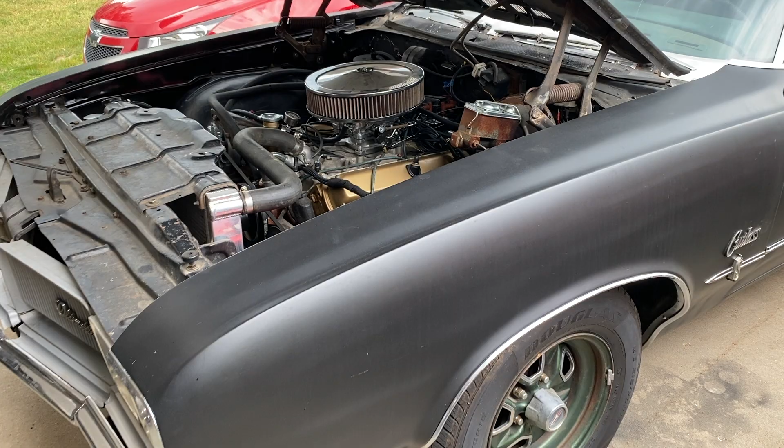All right, let's go ahead and take you inside the engine bay here. As I mentioned, there's the Champion radiator, and then you can see the single fan. I think that's a 12 or 13-inch fan, and it's held in with those little zip tie things that go through the radiator. I'm not a huge fan of those, but they do work in a pinch. And then I have the 2 wires here.

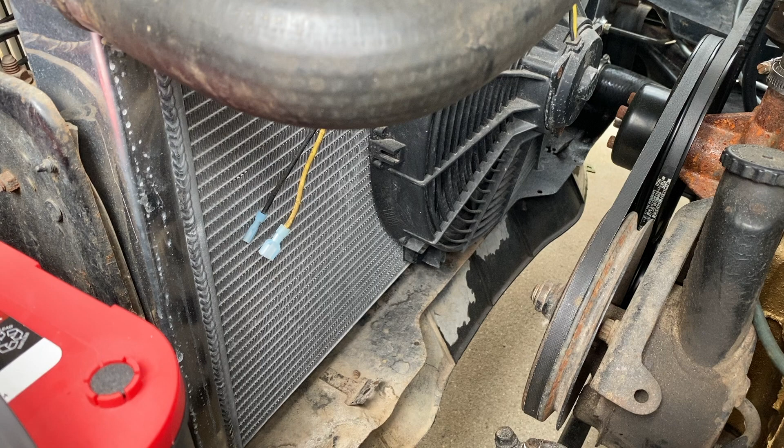I've actually taken out the wires. I haven't been driving the Cutlass too much this year, so I haven't really had any issues with it overheating yet by taking it longer distances, but I went ahead and took out the switch currently, and it's just 2 wires hanging. But to take this out, it's going to be relatively simple - just gotta cut the zip ties holding it in, and then remove it from the radiator. But this thing worked okay, but I think with the fan shroud not there, it's really not doing its full potential. So let's go ahead and remove this old fan, and then we'll take a look at the new fan shroud and dual fan system.

So before we get the fans out, I went ahead and took out the battery that I purchased last year. This is an Optima Red Top, and I've just been having some major issues with how it's been charging, holding up, and the cranking power. So I'm actually going to have my neighbor Kyle come over, and he's going to test this for me. He has all the means to actually test it with all the right tools and everything like that. So he's going to head over here in just a few minutes and test this for me, and see if it's a bad battery, and maybe we might have to take it back and get it replaced. So let's go ahead and get him over here.

All right, well, my buddy Kyle's here. This is Kyle - he also has a YouTube channel, The Educated Idiot. I'll make sure to put a link up here so you can go check his channel out. He came over and has a battery tester for us. So what are we gonna do here? We're gonna test the battery, see what the output is, the cold cranking amps, see where it stands against the manufacturer's specs. We'll test that now. Cool, awesome - so let's go ahead and get a close up and see what he's gonna do.

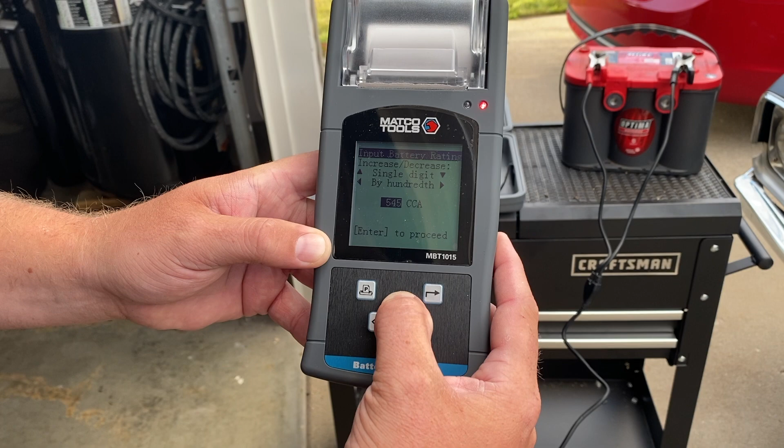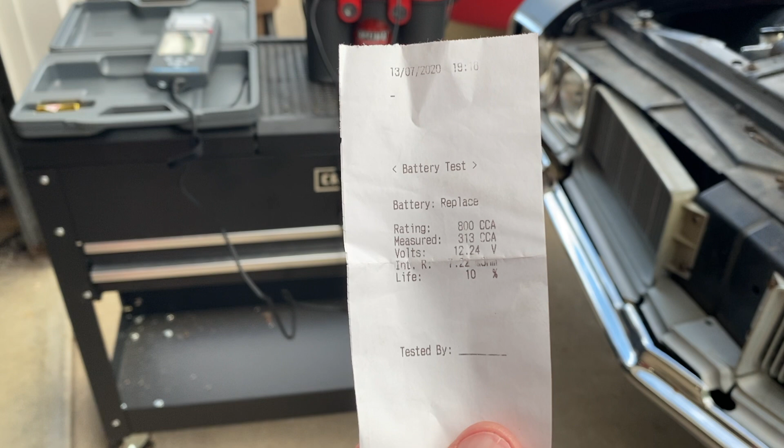We just went ahead and ran the test here real quick, and it spit out this piece of paper. Unfortunately, we weren't able to capture that, but this is the cold cranking amps of what it should have been, and then actually what it measured at. It's only measuring out to about 313 cold cranking amps out of the 800, which is very bad, which pretty much says that battery is bad.

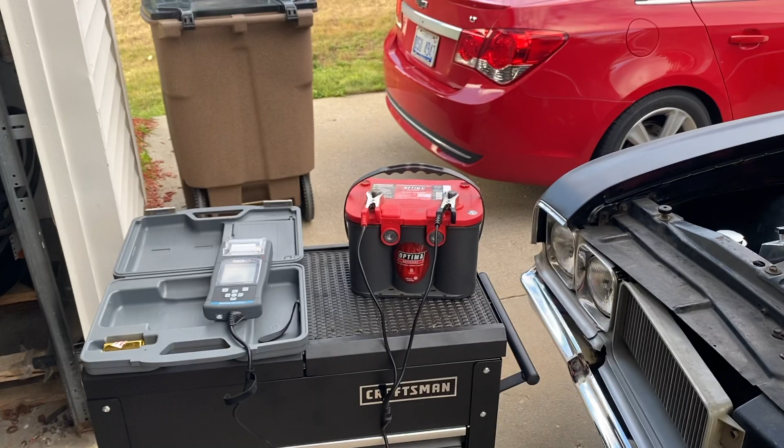So we're gonna go ahead and take that back to Advance Auto. I really appreciate Kyle coming over here real quick to test this battery for me. We can go ahead and get a free replacement on this. It's a 3-year warranty on it as long as you have the receipt, so no big deal there. We'll go ahead and go right now to Advance Auto and get that.

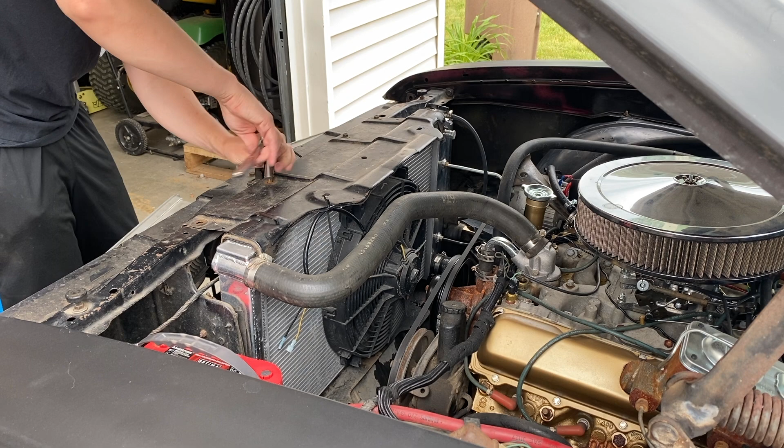So now with the fan out, let's go ahead and open the box for the dual fan system and take a look, see what we got. I'm guessing this is the fan. Got two boxes here, I'll open those up in a minute. Got a couple of wiring harnesses, a little bit of hardware, and then we got the fan shroud.

So let's go ahead and take a look at the fan shroud real quick. This looks really, really nice. It looks like it's all been laser cut and bent and everything like that. It looks very professional. There's a layer of plastic over top of it that I could peel off for a nice finished look. And the inside looks really good too, so very happy with that.

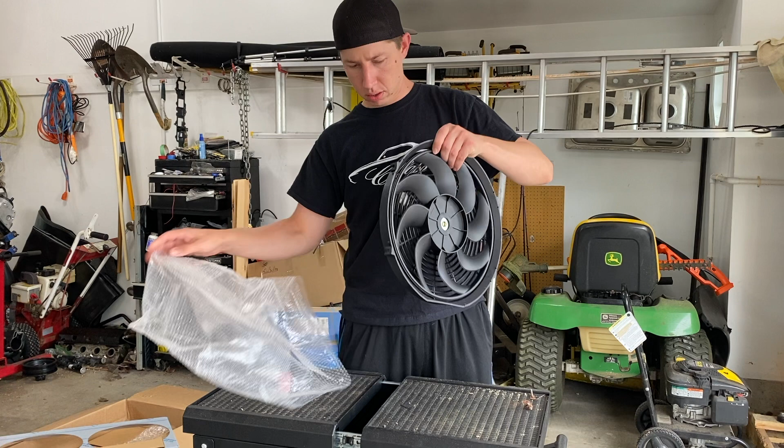So these are 14-inch fans. See there. These seem very nice. Can't say anything bad about the quality of them. Look good, so we'll go and open up the other one here off camera.

And then one thing I asked for was the female connectors or the male connectors that go to the fan connections there. So they actually supplied them to me, really nice of them. And these will be really easy to hook up and give a more clean, professional look. And like I mentioned, just the hardware.

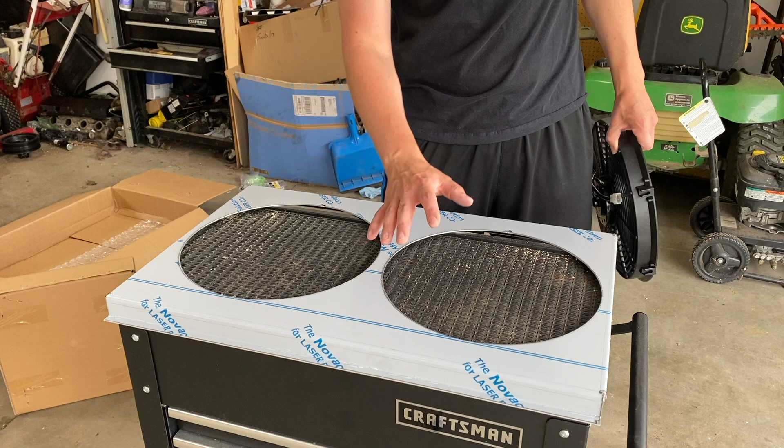So let's go ahead and take this over to the vehicle, see how it's all mounted up, and get it installed. According to the instructions, the first thing you want to do is map out where you want the fans installed. So I have one of the fans right here, and I'm gonna attempt to lay it on similar to here.

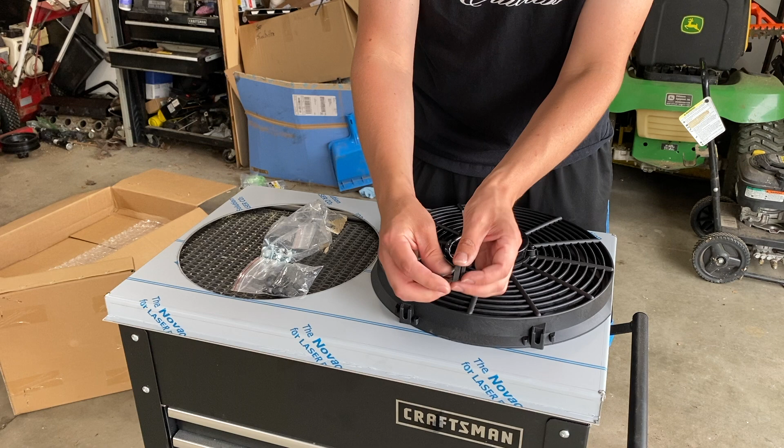See how that looks. So everything fits really nicely. The holes look cut perfectly, everything like that. And then they also give you these little tabs that slide into here, so let's go ahead and get those out of the hardware pack. These tabs are molded exactly for this fan here, and they just kind of slide in there like that. That's what's going to hold down the fan to the shroud. They have a lot of pressure on them and everything like that, so it'll fit really well. So those are going to work really, really great.

And then I kind of want this flush mounted all the way on the side here. It's pretty easy, it's not rocket science, it's really easy to just line that up flush. It looks good then on the other side, and it's going to leave enough room in the middle for both fans to sit right next to each other. So I'm going to go ahead and get the other fan up here as well to make sure there's no fitment issues before I mark the holes that I want to drill. You're going to have to drill out these 4 holes to make sure they fit correctly.

So here's the other fan right here. I'm going to make sure it's all lined up just like the other one. And if I push these 2 fans together in the middle, they fit perfectly right next to each other. And what's really cool is that they're perfect on both sides of the shroud too, so both sides are flush. This is connected in the middle, and these are going to fit perfectly. So let's go ahead and get the hardware out for the other fan.

And what I want to double check is the height on this. So I want to slide these a little bit this way, that way it centers up a little better. There we go, that's looking really, really good.

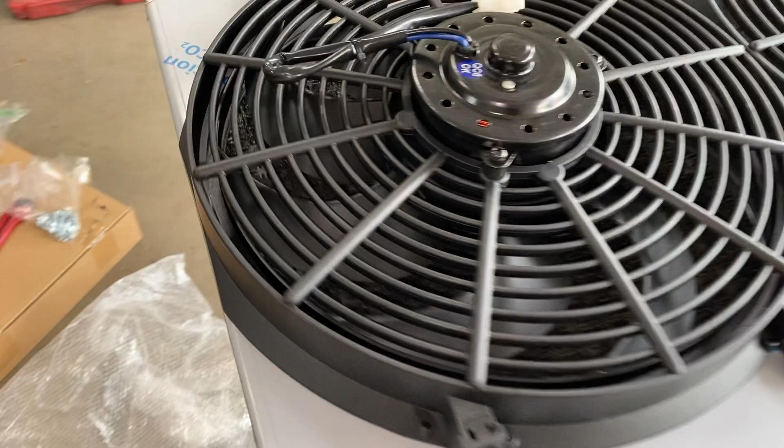Let's go ahead and get the camera in here, I'll show you what I'm talking about. So we can see here, nice and flush on the side. We got all the hardware all the way around. Both fan cords are pointing the same exact direction, same orientation. And then looking down, you can see that the fan has the same outline as the fan shroud on both sides here.

So I think this is in the right position that we want it in for maximum cooling. And then the next thing we just need to do is mark the holes for where we need to drill. So let's go ahead and get the marker out, mark those holes, and then bolt this up.

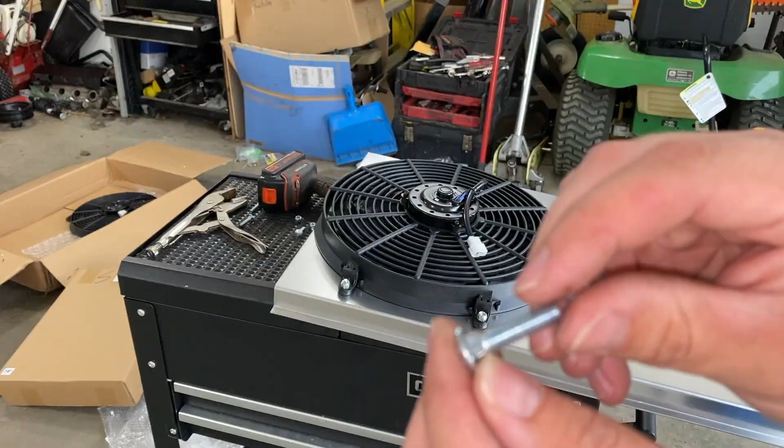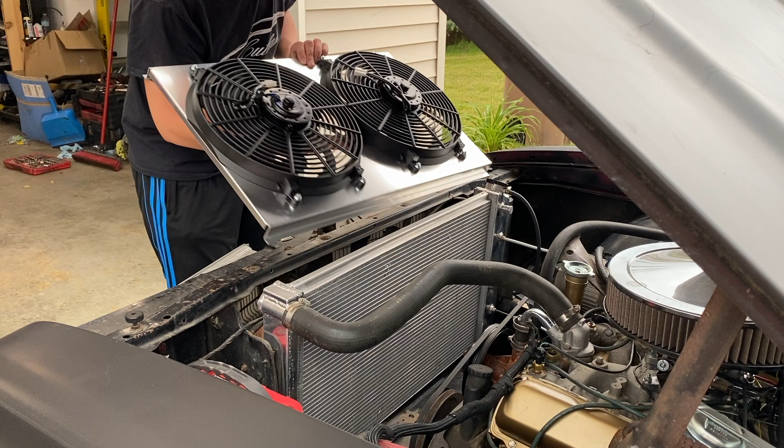So the radiator fan shroud just kind of slides right in front of the radiator here. Make sure you don't hit your radiator, any of the fins or anything like that, you don't want to cause a leak. But essentially what it does is it sits down and runs on these rails right here on the top of the radiator. These are just to hold the radiator actual core into the side rails and everything like that.

This is actually where you're going to be bolting this up to with those self-tapping screws supplied in the kit. But we got to make sure that it sits flush on the bottom just like it is here on top, and it mounts it real nice and close. So I got to do some finagling, trying to get this in here just perfect. I'll go ahead and do that, and then we can look at those self-tappers and get this thing installed here.

So I think I got this thing down into the right spot here. It's sitting flush here on the bottom, I can feel it fitting flush on the bottom. So I'm really liking how this is fitting. I think we can go ahead and shoot some self-tappers into here.

Remember, this is just your top core rail, it does not do anything as far as cooling. It's just for holding in the core. So I'm going to go ahead and shoot a couple of screws into here and get this thing all lined up. Then I'll have to run underneath and do the same.

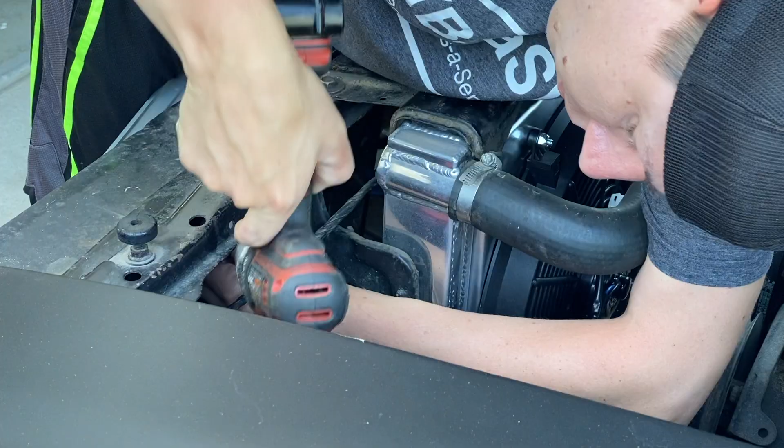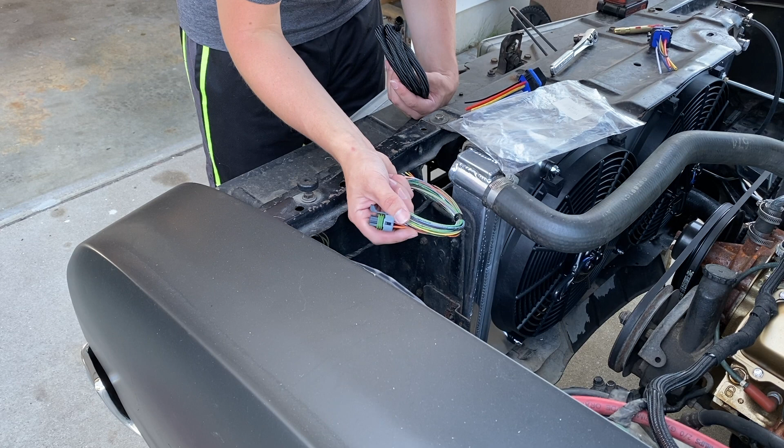Now with both of these relays put into place, we took off the bottoms of them where the wire connectors are, just to make it easier to wire everything up. We can start focusing on the harness we got from Holley to hook into the Sniper system. This has all the leads for all the things you can control, but we're really just going to focus on the two leads that control the fan outputs that go to the relay. So we have the wiring harness and some wire loom here, and now we're going to plug this in and figure out how we want to route it. Let's start doing that.

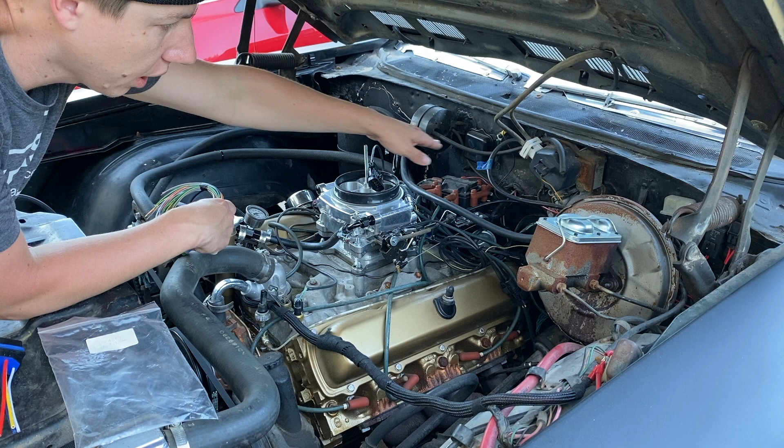On the back of the Sniper EFI system, we have this one electrical connector here. This is the connector that has this harness connected into. We just need to route this out the back, run the wiring along the back side and up the side fender to make it look clean, and hook it into the relay to get some power. Let's go do that.

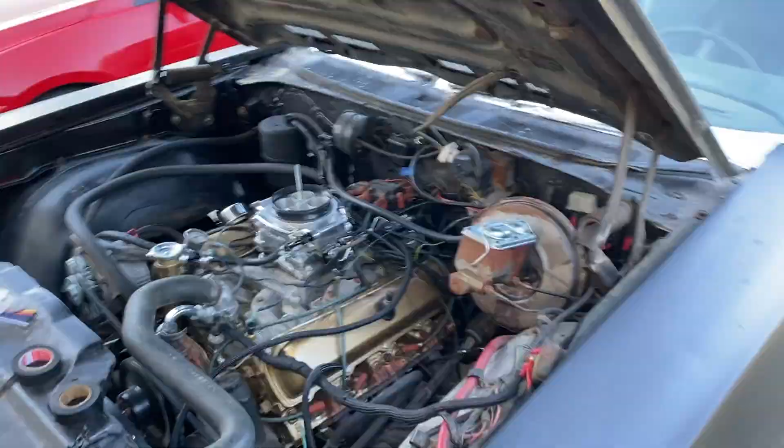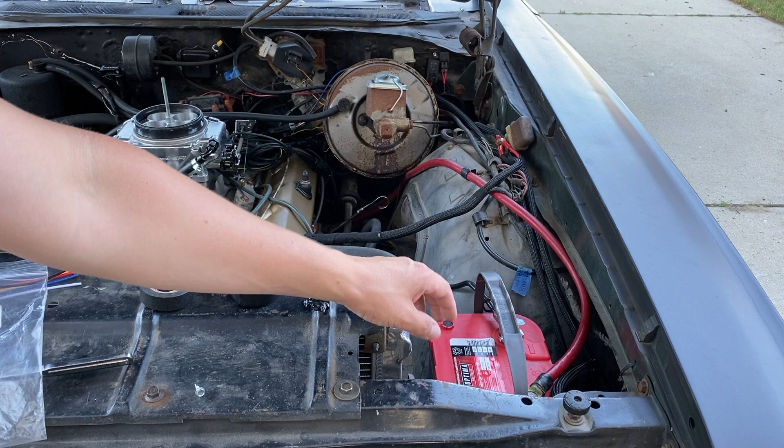Now that we have the Sniper EFI harness connected, and we ran it on the side of the fender with all the other wires, we have it tucked away and ready to wire into the relay. Let's take a look at the relay and how we need to wire it.

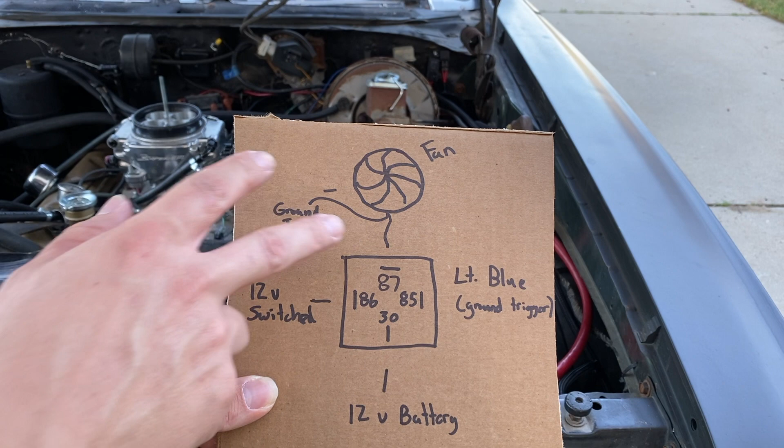This is a quick drawing I did, and we'll use this to explain how we're going to wire this. On the fan, you have a positive and negative. On the negative, just ground that to the frame, or you can ground it to the battery if you feel like running one back to it, but you can ground it to either. Then you have a fan positive, and that fan positive is going to run to the 87 relay terminal. If you look on top of your relay, you have 87.

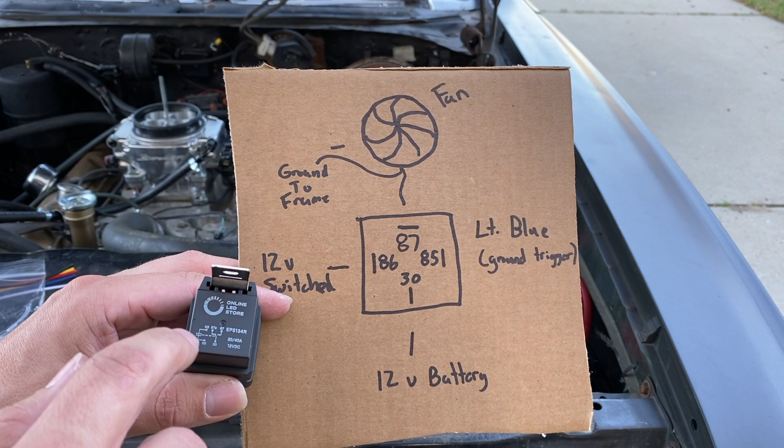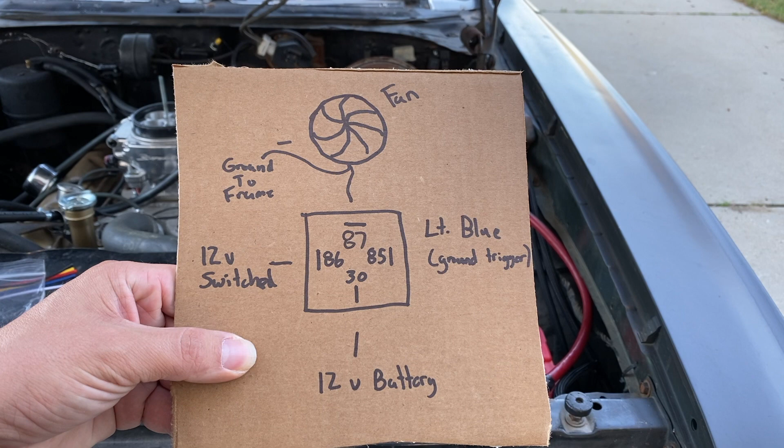Now I have a 5-pin relay, though there's also a 4-pin relay. On my 5-pin relay, I have an 87 and an 87A. We're just going to run that to 87, not 87A, so just ignore the 87A pin output. Then you're going to run the light blue wire from the harness for the Sniper EFI system, that's the ground trigger, to number 85. You're going to have a 12-volt source that you run to number 30, and a 12-volt switch source that you run to number 86.

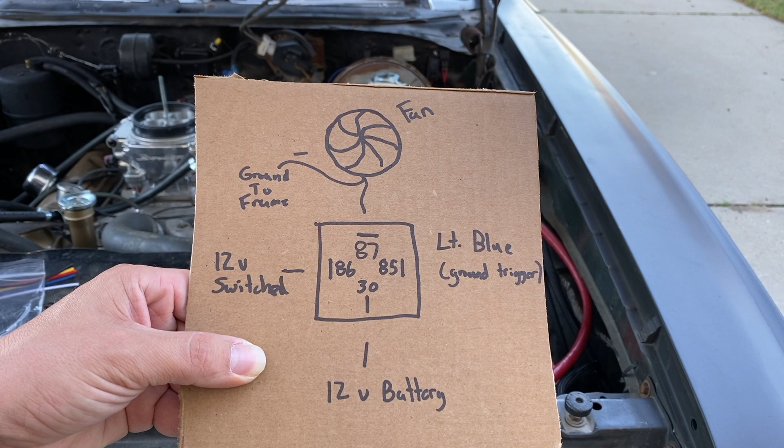With all that wired just like that, we can go ahead and use the functionality that the Sniper EFI gives us. This is a safe way of how to do it. You never just want to hook up the fans to the Sniper EFI system without the relay.

So let's go ahead and use this as a template, and let's go ahead and wire everything up. The first thing I'm going to do is look at the positive, so I'm going to open this up. This is our fused link here.

Now you want to use the fuse link just in case something ever shorted, so you can kind of save your fans, your relay, and everything like that. I got 2 of them in this package, 1 for each relay. It also came with fuses, but we're not going to be using them because we need 30 amp fuses. Now I want to hook these up to this wire right here. So we'll go ahead and splice back each one of these, get the heat shrink tubing over top of it, and connect these up like we need to.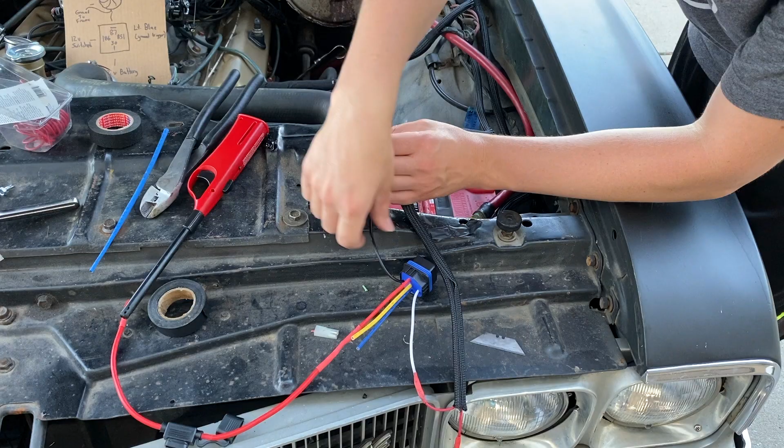There we go. Now we got the ground cables hooked up. The only thing left is to hook up the fans. The fans are going to hook up to the blue wire here, and we'll go ahead and run those over to the fans right now.

All right, all the wires are now ran. The only wire I have left is this yellow wire on each one of the relays. That's because this is for the 87A that I'm not going to be using. So just a quick reminder, this is how we hooked it up.

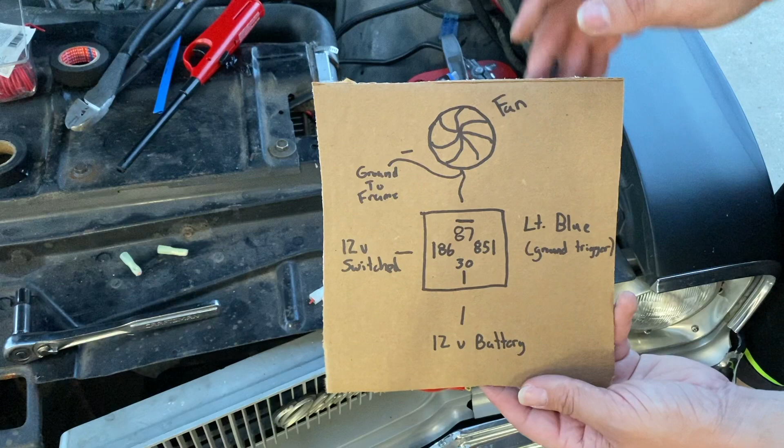So we have the fan hooked up - that was the fan to the 87, grounding it to the frame. I already did that off camera. We hooked the light blue up to the ground wire on the relay, that was the black wire. We have the 12 volt battery source, which is the red wire. We have a switched wire, which I believe was the white wire that goes to 86.

And with all that now hooked up, we should be able to go ahead and plug in these relays. And when we plug in these relays, the only thing I'll have left is to route the 12 volt battery wire to the battery. So let's go ahead and plug those relays in.

All right, I went ahead and hooked up the positive cables to this terminal connector. I think I'm going to change this out — might do it off camera, but I'm just trying to test it right now to see if everything's okay. I just don't like how this is all getting stacked up, but we'll probably address this in a future video, or I'll do it off camera.

Next we're going to throw in 30 amp fuses in these. So I'm going to get some 30 amp fuses. We got one here, let's shove that one in there. There we go, and we'll go ahead and put this back down on the terminal.

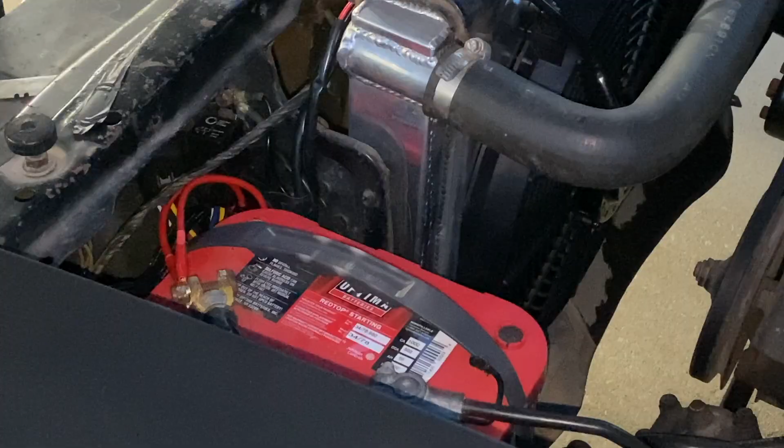There we go, we got everything now installed. The relays are all hooked up, we got power ran, got the grounds hooked up. We'll go ahead and deal with these wires a little bit later, make sure they fasten up nice and well to stay out of the way of the belt accessory. I think everything's pretty much squared away here. So tomorrow we'll hop inside the car and make sure everything's working correctly as it should.

I need to charge up my battery a little bit so the fans can run at their max capacity. But we'll go ahead and fiddle with the Holley Sniper EFI dashboard, the touchscreen, to make sure everything's going to work exactly as we think it should. We got a lot done today, and we'll pick this back up in the morning.

So it's the next day now. I got the battery charger on the battery, it's still going to be running on it, but we can go ahead and hop inside the car, fiddle with the dashboard controls, mess with the outputs, and see if we can actually get those fans to turn on.

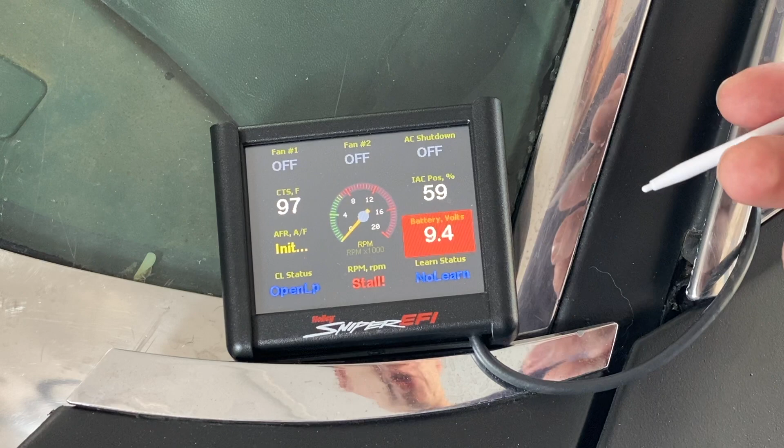So let's hop in the car. We can test this without the car on, just with the key in the on position. We can see the battery voltage going up and down, mostly because of the battery charger being on there. But we have a coolant temperature sensor reading of 97, 96 degrees — it's quite hot here today. So let's go ahead and go inside the system here.

Just click on the screen, we'll go to home, then to tuning, then system, then outputs. Our outputs here are set at 195 degrees for fan 1 to come on, and fan 1 off is at 190.

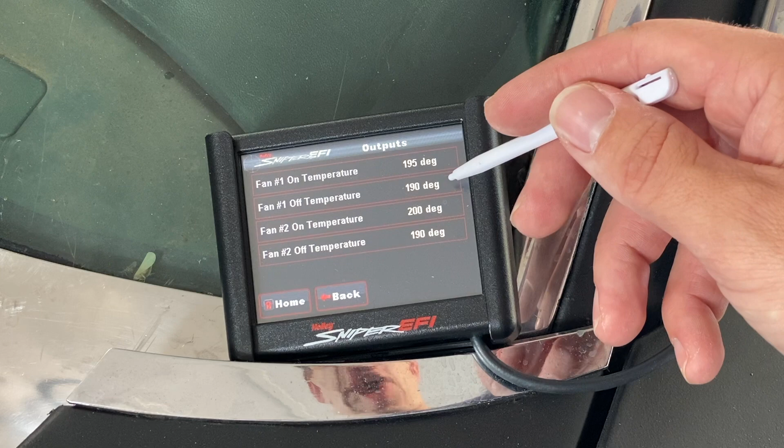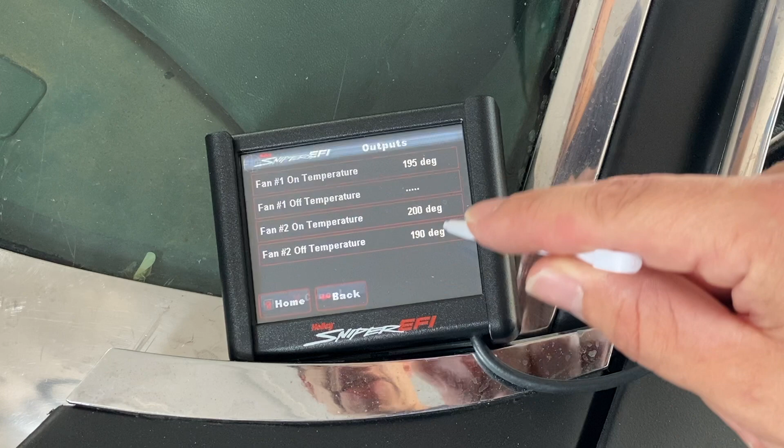So let's just kick this down to something crazy here. We'll do the fan off temperature first, take that down to 18 degrees. And then let's do the other one down to like 72, so it should come on at 72 degrees and turn off at 18 degrees. Kind of ridiculous, but just for a test, and press save.

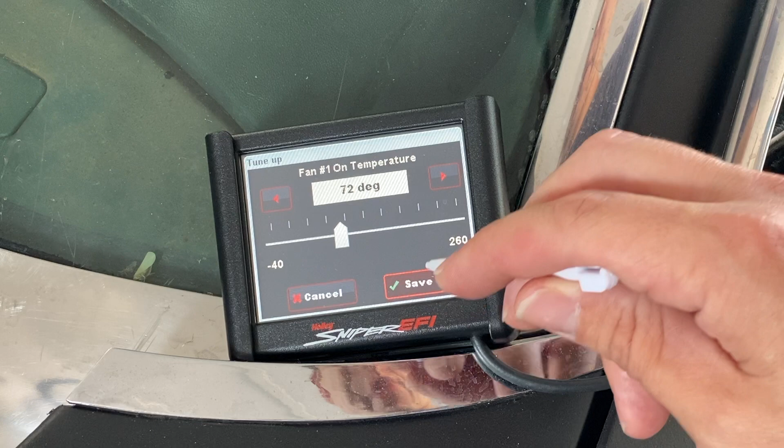And there we go, you can hear the fan just kicked on. It's going to turn over to the right, left here. And you can see we're now blowing on fan number 1.

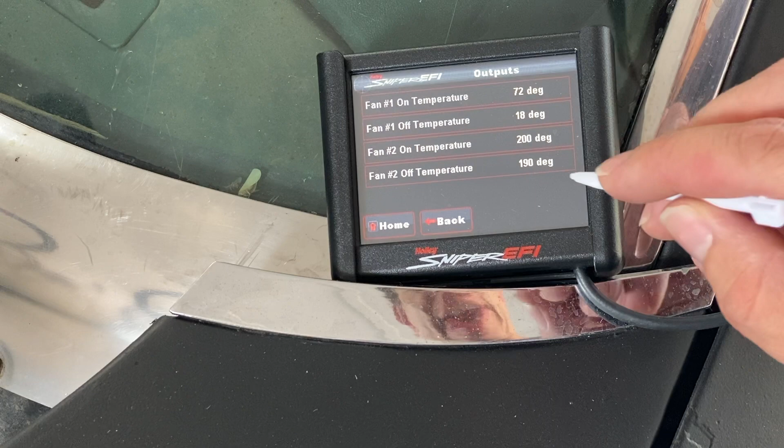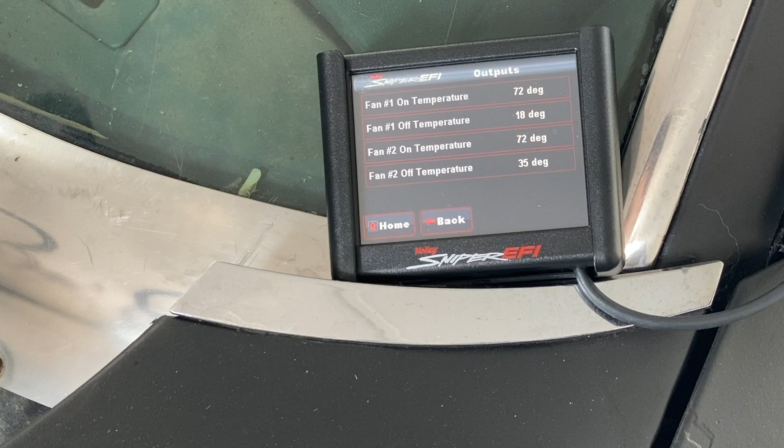Now let's go ahead and do the same thing for fan number 2. There we go, I just heard the fans kick on. The battery charger is kind of taking a little bit of a beating here. Fan 1, fan 2.

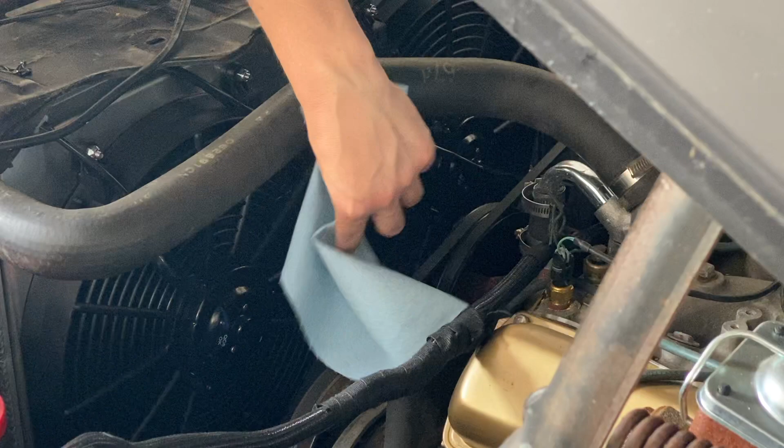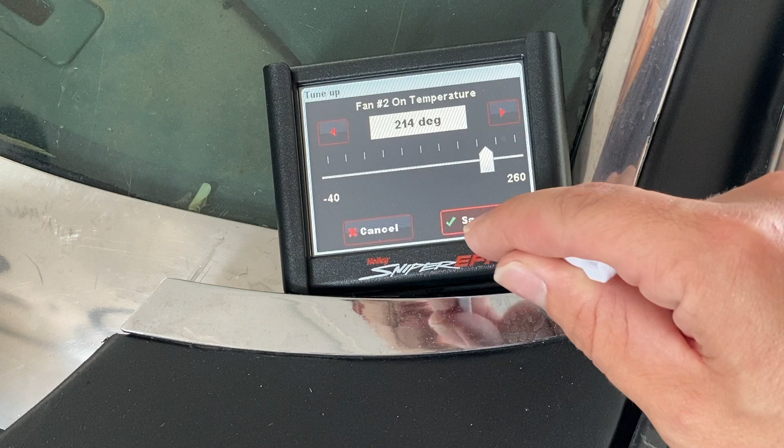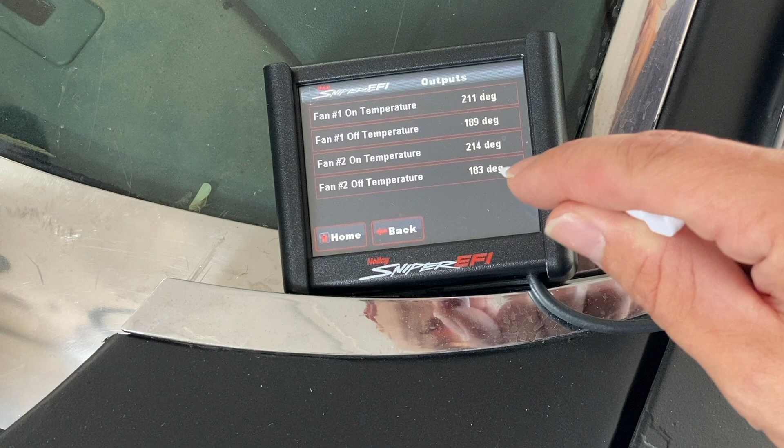So now we'll go ahead and set these back to something not so crazy here. There we go, both fans are now off.

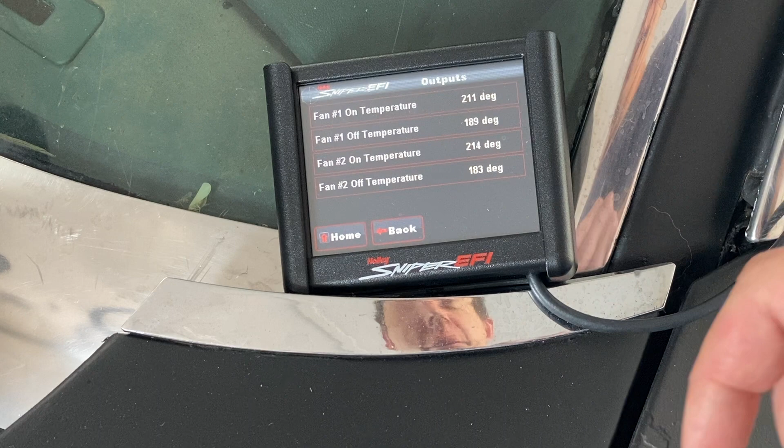I will go ahead and fine tune these once I actually get the car running again and on the road, because I want to make sure I get them at the right temperatures for when the fan should kick on. I'm thinking probably around 195 for fan 1 and kick off at 190, and then around 200 for fan 2 and kick off at 190 as well. I just don't want to overheat the vehicle.

But let's go ahead and wrap this up. So there you have it — we went ahead and put together the fan assembly in the shroud, installed all the relays and wiring and everything like that, and hooked it up to the Sniper system. Made everything look really, really clean. I really like how it turned out. So the only thing left to do is mount the dashboard again, throw it back in the car, drive it a little bit, and see how much I like it. But it should be keeping this car a lot cooler now, and I don't have to mess with anything — it's all automatic because of the Holley Sniper system.